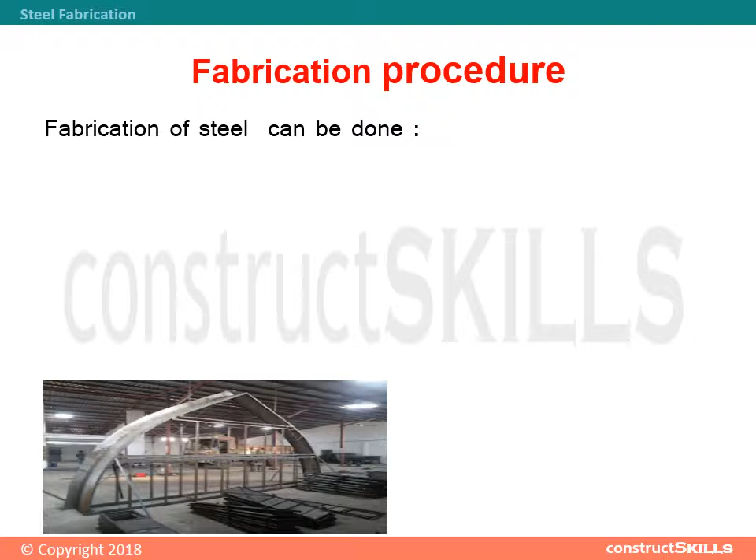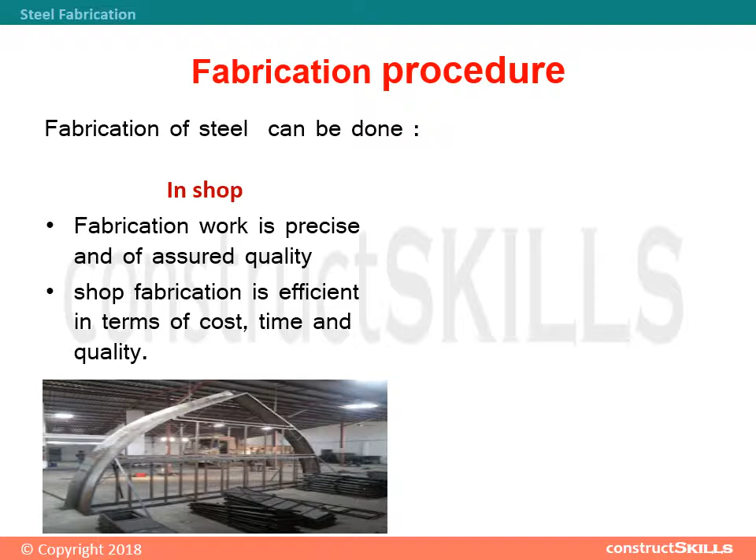Steel fabrication. Fabrication procedure. Fabrication of steel can be done in shop and on site, both as under described. In shop, fabrication work is precise and of assured quality. Shop fabrication is efficient in terms of cost, time and quality.

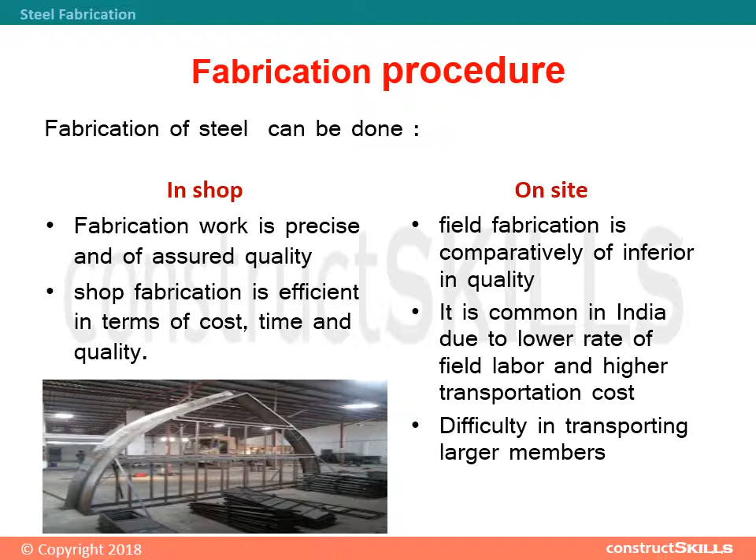On site, field fabrication is comparatively inferior in quality. It is common in India due to lower rate of field labor and high transportation cost. Difficulty in transporting larger members. Sequence. Here, the sequence is described for how fabrication is to be done.

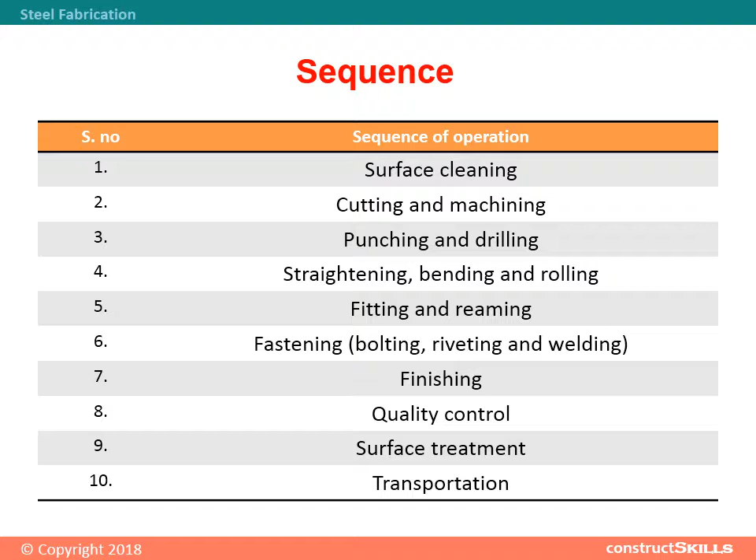1. Surface cleaning. 2. Cutting and machining. 3. Punching and drilling. 4. Straightening, bending and rolling. 5. Fitting and reaming. 6. Fastening, bolting, riveting and welding. 7. Finishing. 8. Quality control. 9. Surface treatment. 10. Transportation.

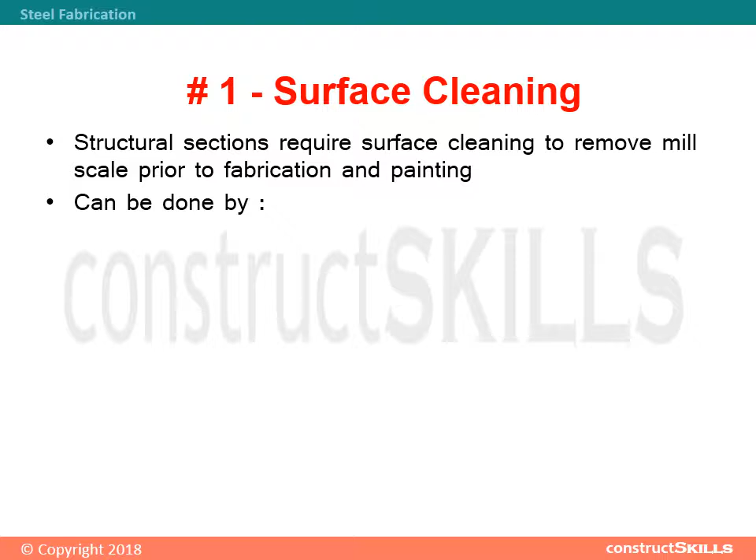1. Surface cleaning. Structural sections require surface cleaning to remove mill scale prior to fabrication and painting. It can be done by hand preparation, such as wire brushing, but this does not normally conform to the requirements of modern paint or surface protection systems.

Blast cleaning is the accepted way of carrying out surface preparation. Abrasive particles are projected onto the surface of the steel at high speed by either compressed air or centrifugal impeller to remove rust and roughen the surface before applying the coating.

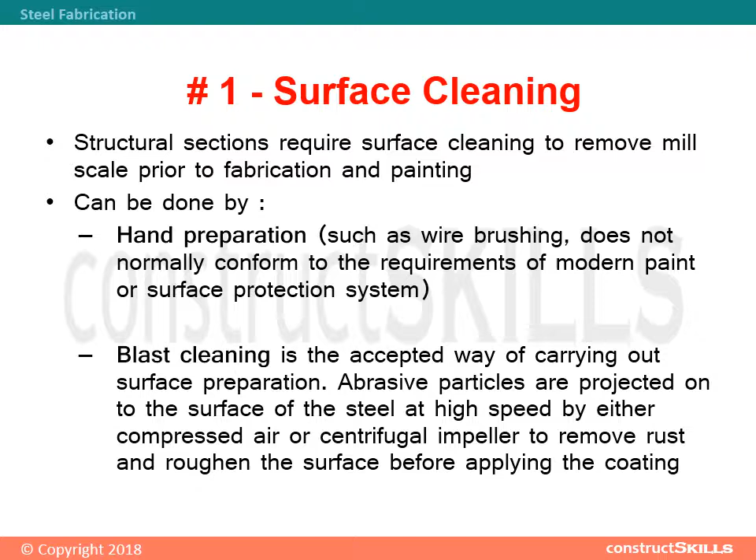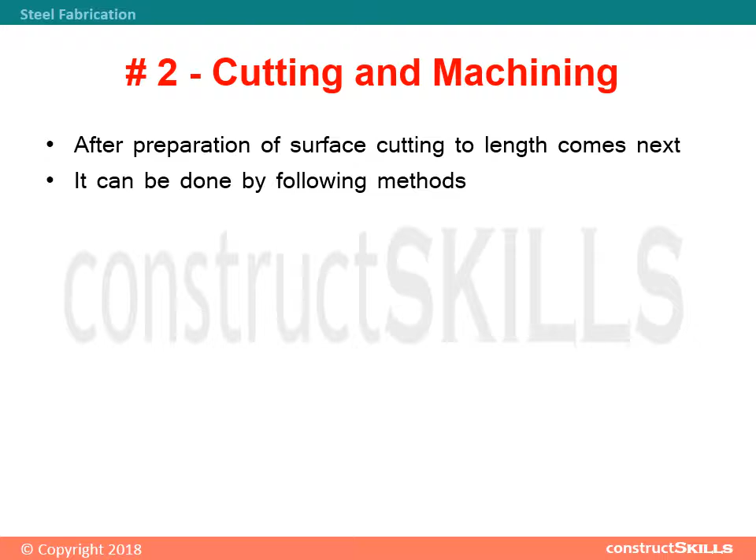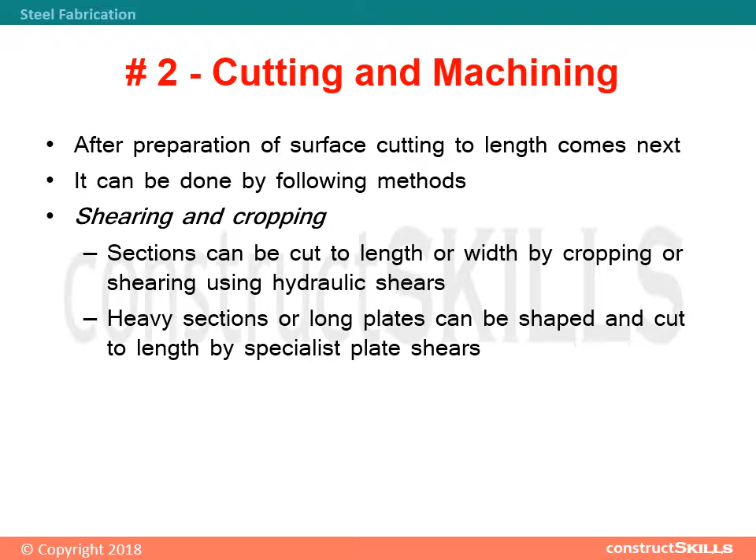2. Cutting and machining. After preparation of surface, cutting to length comes next. It can be done by following methods: shearing and cropping. Sections can be cut to length or width by cropping or shearing using hydraulic shears. Heavy sections or long plates can be shaped and cut to length by specialist plate shears. For smaller plates and sections, machines featuring a range of shearing knives, which can accept the differing section shapes, are available.

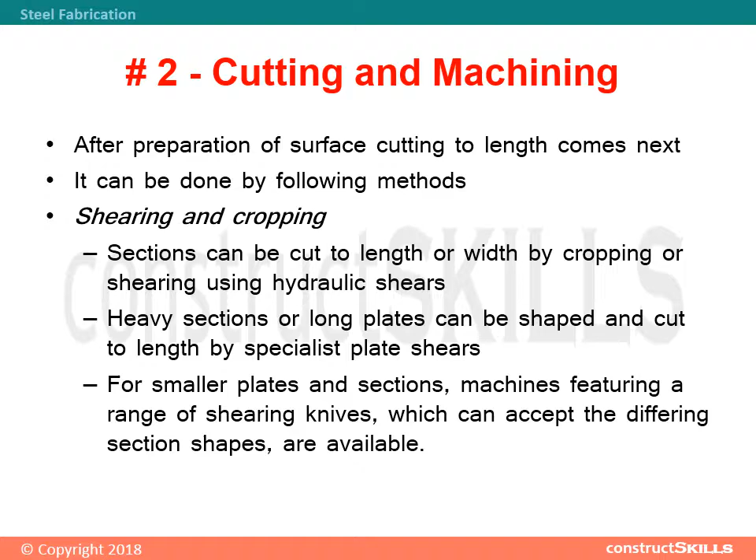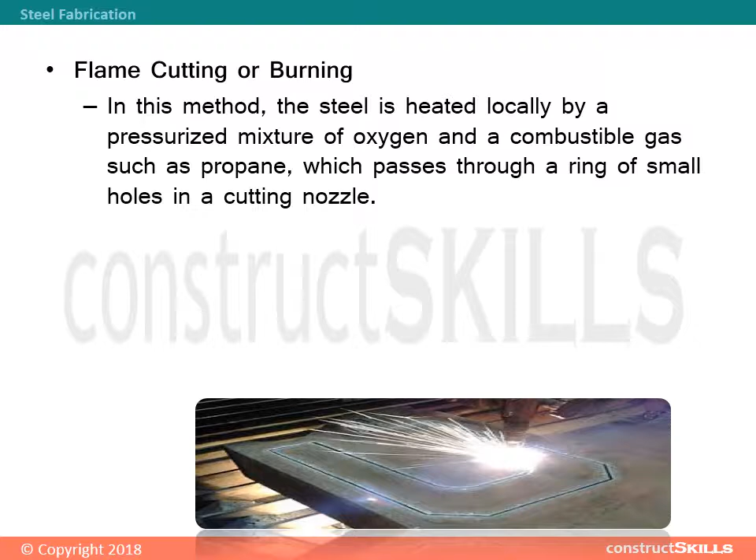Flame cutting or burning. In this method, the steel is heated locally by a pressurized mixture of oxygen and a combustible gas such as propane, which passes through a ring of small holes in a cutting nozzle. The heat is focused onto a very narrow band and the steel melts at 15,000 Celsius when a jet of high-pressure oxygen is released through a separate hole in the center of the nozzle to blast away the molten metal in globules. The desired cuts are obtained quickly by this process.

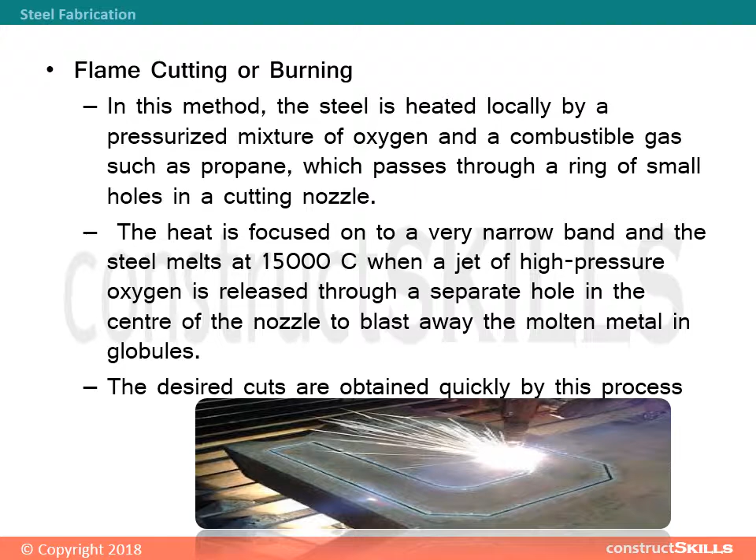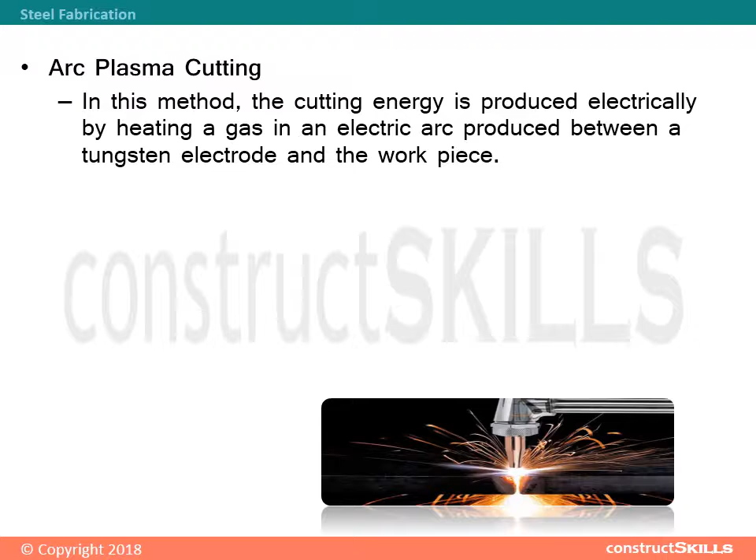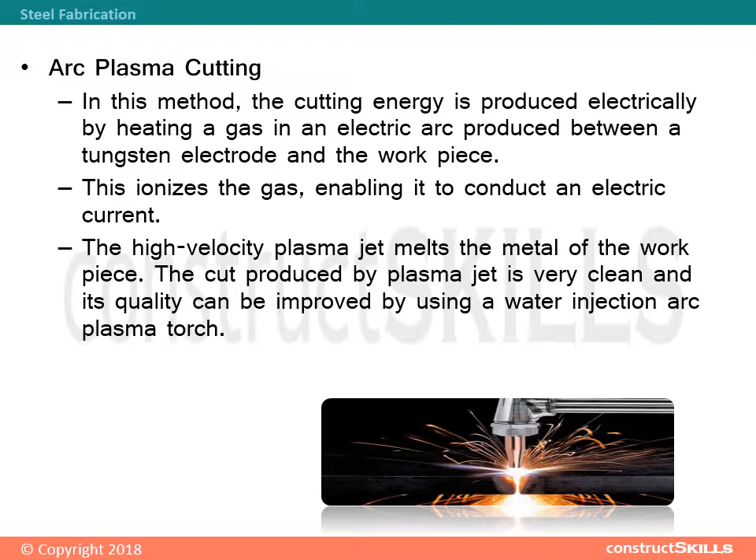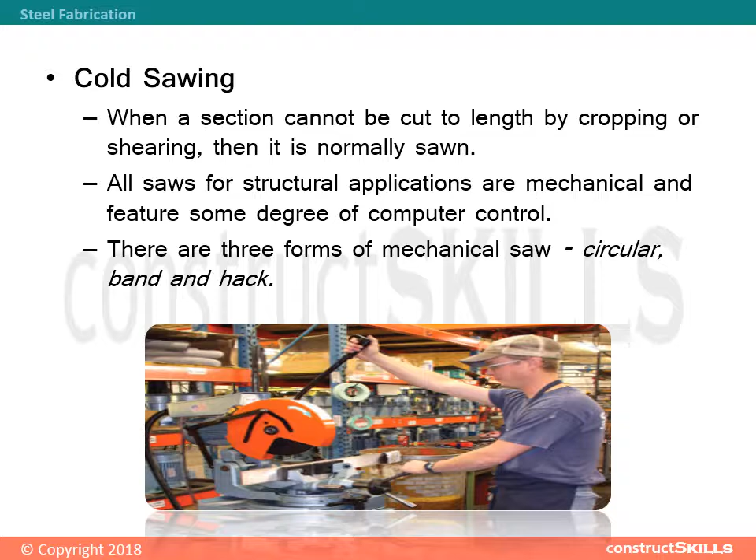Cold sawing. When a section cannot be cut to length by cropping or shearing, then it is normally sawn. All saws for structural applications are mechanical and feature some degree of computer control. There are 3 forms of mechanical saw: circular, band and hack.

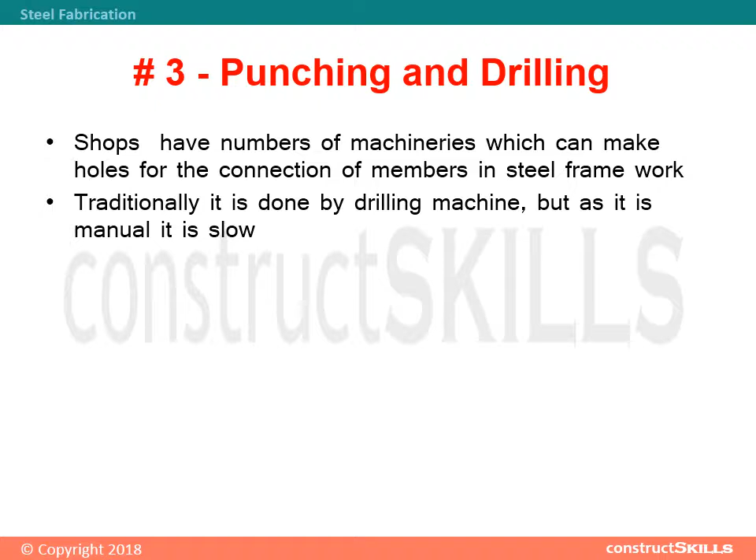3. Punching and drilling. Shops have numbers of machineries which can make holes for the connection of members in steel framework. Traditionally it is done by drilling machine, but as it is manual it is slow. Larger fabricators have installed NC, numerically controlled, tooling, which drills in response to keyed-in data. It can make many holes in flanges and webs of rolled steel sections simultaneously. Punching holes is also possible, and useful where square holes are specified, such as anchor plates for foundation bolts.

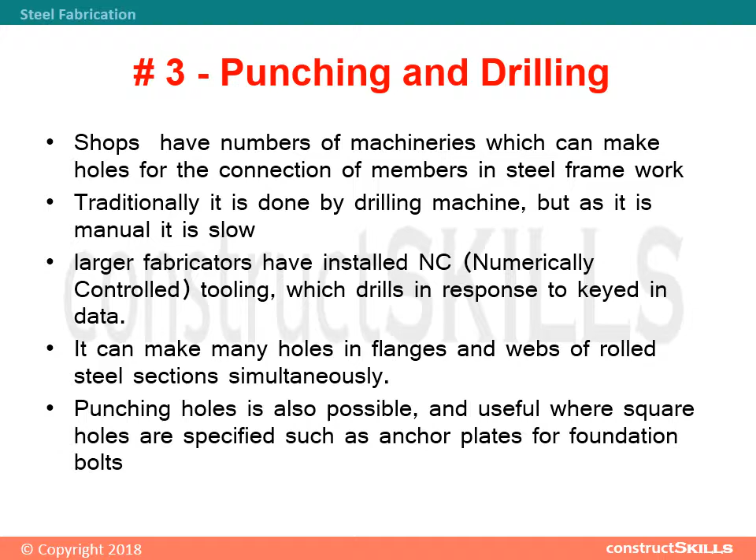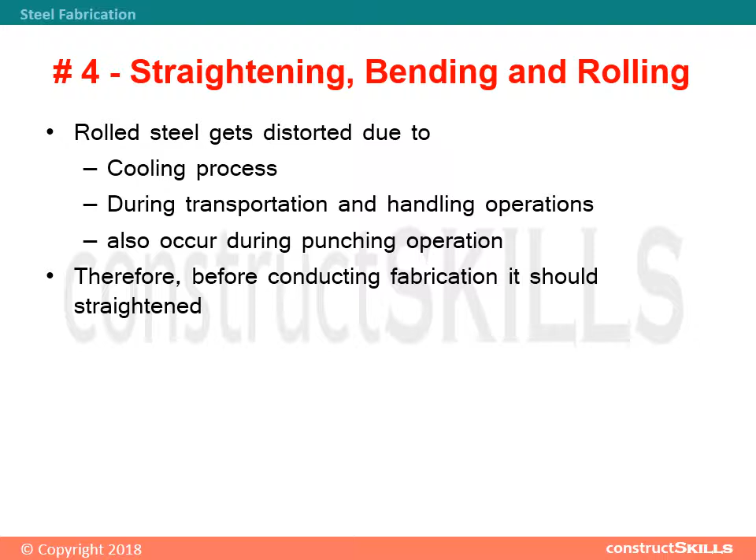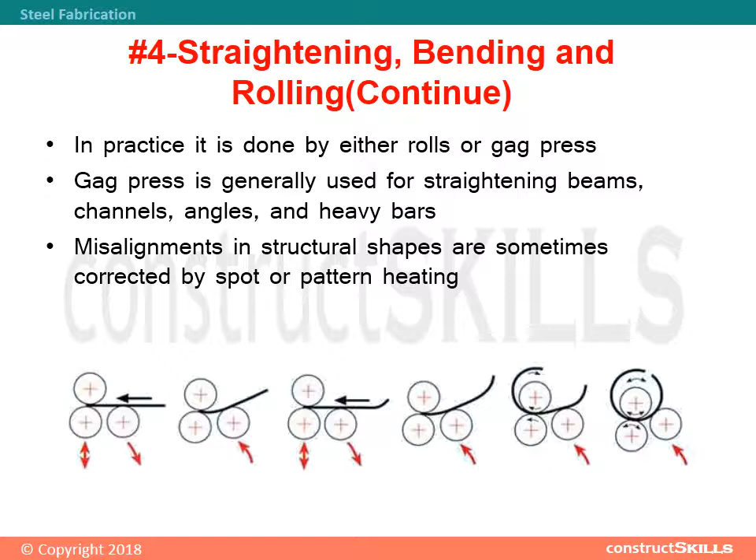4. Straightening, bending, and rolling. Rolled steel gets distorted due to the cooling process and during transportation and handling operations. It also occurs during punching operation. Therefore, before conducting fabrication it should be straightened. In practice it is done by either rolls or gag press. Gag press is generally used for straightening beams, channels, angles, and heavy bars. Misalignment in structural shapes is sometimes corrected by spot or pattern heating.

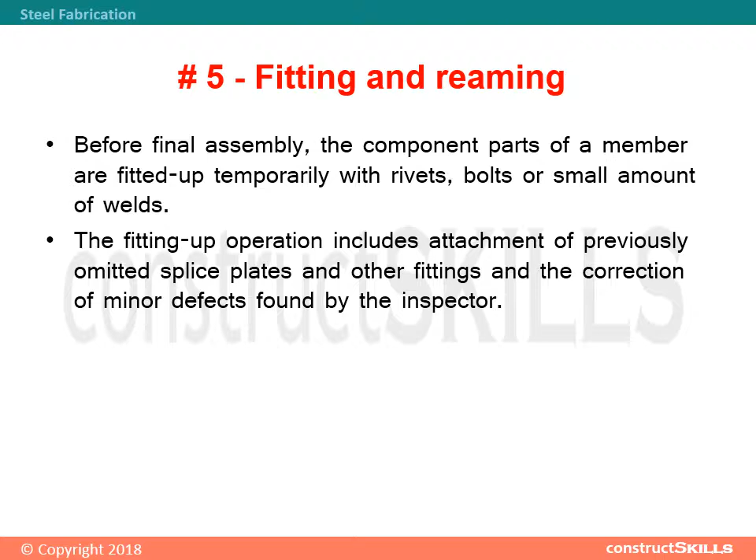5. Fitting and reaming. Before final assembly, the component parts of a member are fitted up temporarily with rivets, bolts or a small amount of welds. The fitting up operation includes attachment of previously omitted splice plates and other fittings and the correction of minor defects found by the inspector.

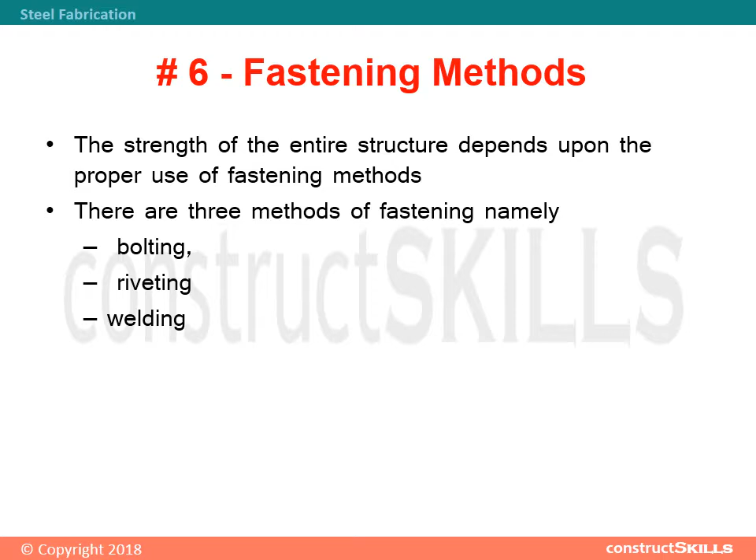6. Fastening methods. The strength of the entire structure depends upon the proper use of fastening methods. There are 3 methods of fastening, namely bolting, riveting, and welding. 7. Finishing. Structural members whose ends must transmit loads by bearing against one another are usually finished to a smooth even surface. Finishing is performed by sawing, milling or other suitable means.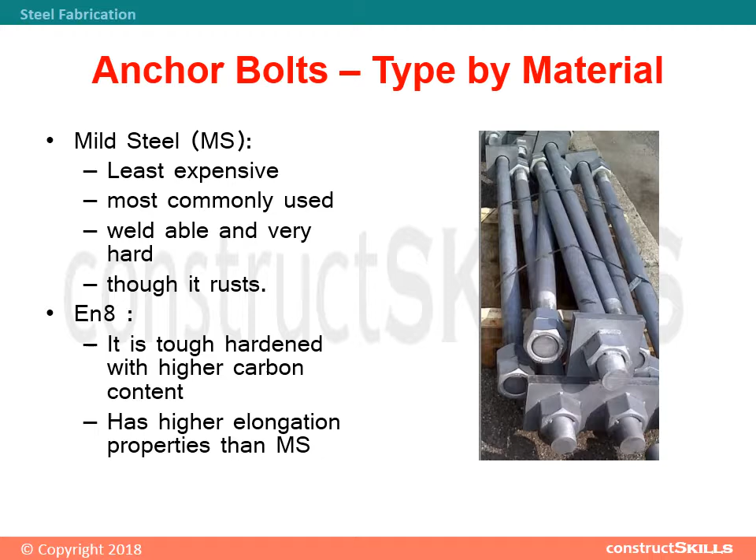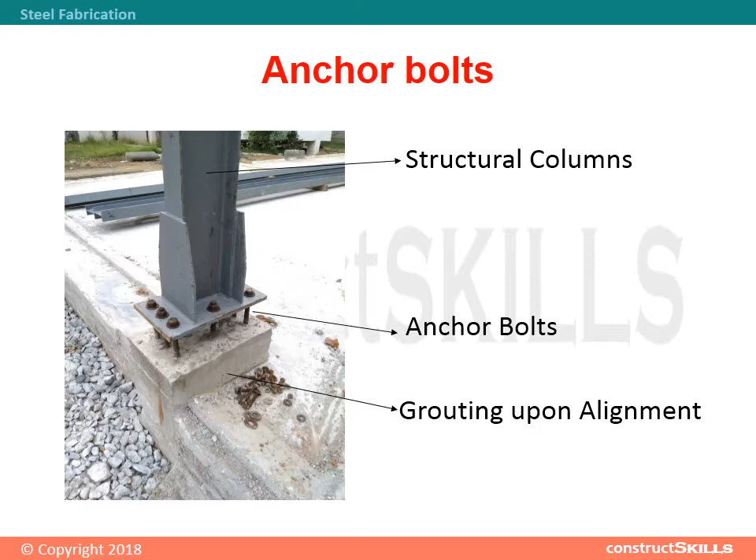Structural columns. Anchor bolts. Grouting upon alignment. Anchor bolt template. For fixing anchor bolts in correct position, template is used. Ensure proper number of templates are fabricated to assist in anchor bolt casting.